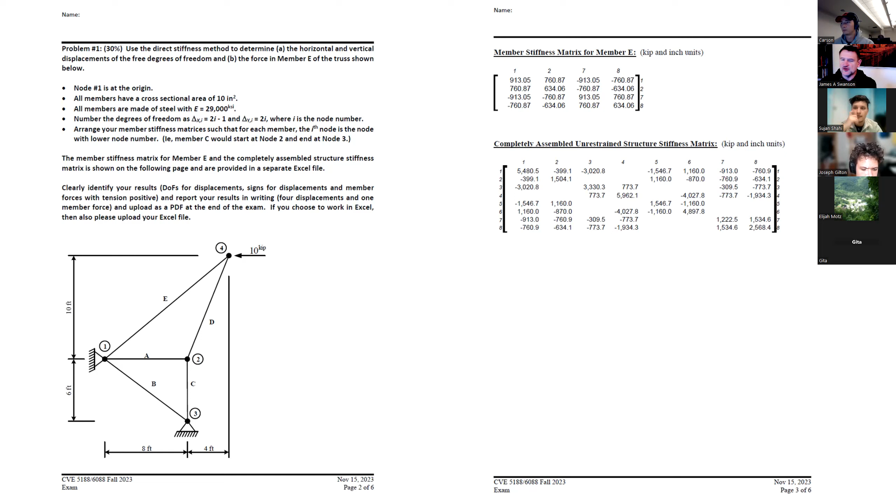I gave you a member stiffness matrix for member E, and the completely assembled unrestrained stiffness matrix to give you guys a little bit of help. If you go through and work out the displacements I asked for, those are given here. In fact, that's all the displacements, because at nodes 1 and 3 there aren't any displacements given, since those are restrained nodes.

The force in member E is 19.53 kips. So a couple of things to note in looking through your solutions - let me sound like an ass for a minute. Nobody should have gotten this wrong, because everybody can go into visual analysis and calculate the right answer. A couple of people still got it wrong.

The displacements I calculated out to 4 significant figures. I had several people submit like 0.0017, or I think there was even one person who submitted 0.002 as the displacement for delta 3. Not okay - you got to go a little bit further than that in order to let me know that you've done some accuracy.

I actually had a couple of people get the force in member E incorrect, and that's something you guys could check using statics and a page - not even a page, a few lines of hand calculations. So again, not to sound like an ass, but you have 3-4 days on a take-home exam. That's probably not something you should miss. That's the slam dunk that goes off the rim and out of bounds, right?

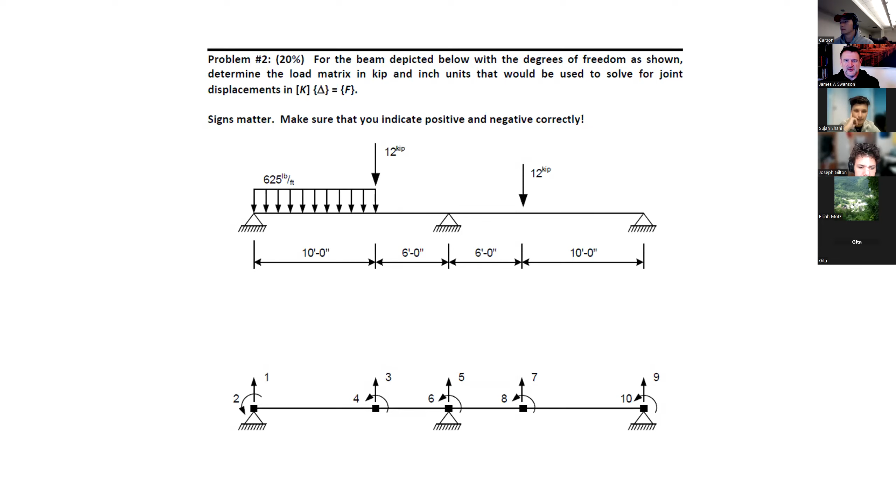Anyways, second problem - I ask you to determine the load matrix associated with this beam. I didn't ask you to actually do the matrix analysis, though I had a couple of people that submitted a full matrix analysis of the problem.

If you go through and use the equivalent end actions, this is the load matrix you should get. I calculated it out using kip and feet units, and then I realized that most of you are going to do it in kip inch units because you're used to using consistent units.

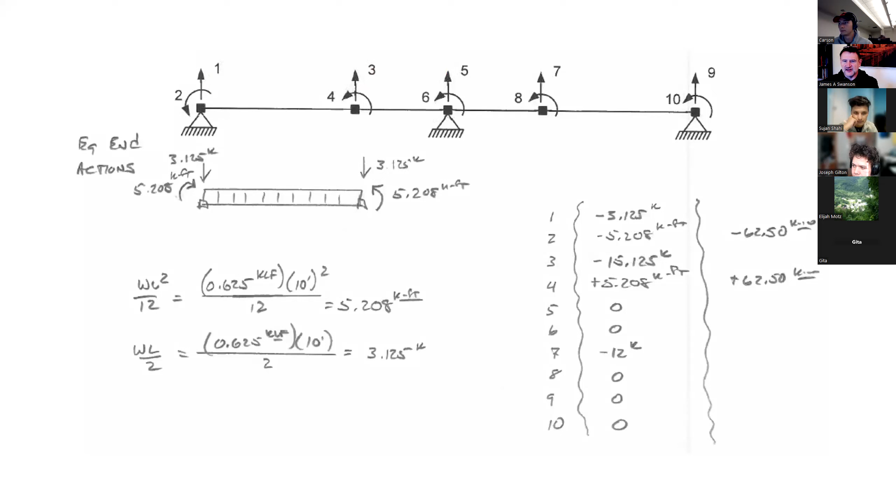So those are the results that you should get for that. Most of the errors I saw in this were associated with using incorrect units or possibly sign errors. A couple of people had signs wrong on these problems.

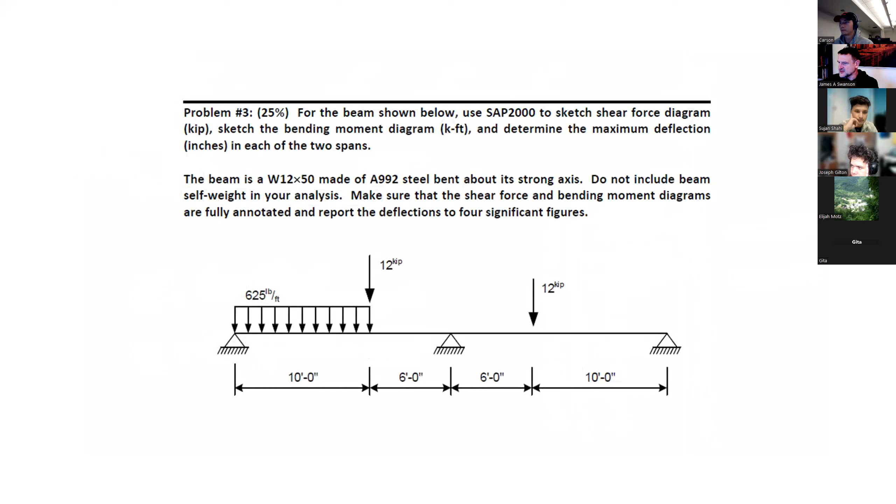The third problem was the same as the second problem, except now I ask you to analyze this beam in SAP 2000 and give me beam deflections and bending moment diagrams. So if we look at those results, this is what we got out of SAP 2000. I think most of the students in the class, and there's only 7 of you, so that's like 5 out of 7, got the right bending moment diagram and shear force diagram.

But we had a lot of errors when it came to the displacements. The crux of this problem is that in order to get accurate displacements or deflections out of a beam problem like this, you have to have nodes along the length of the beam. If you don't put nodes along the length of the beam, SAP 2000 uses a cubic approximation for the deformed shape. And when you have a member subjected to a uniform load like this, that cubic approximation is insufficient. It doesn't give you the most accuracy.

So in order to get accurate deflections, you need to have at least some nodes along the length of the beam. At a minimum, if you put nodes under the point loads, that will give you much more accurate results than having no nodes at all. Just to investigate the extreme, I went in and put nodes every 6 inches, which is probably more than what is really needed for most design work. But I suspect that would give me an answer that would converge if I kept dropping down the nodal location.

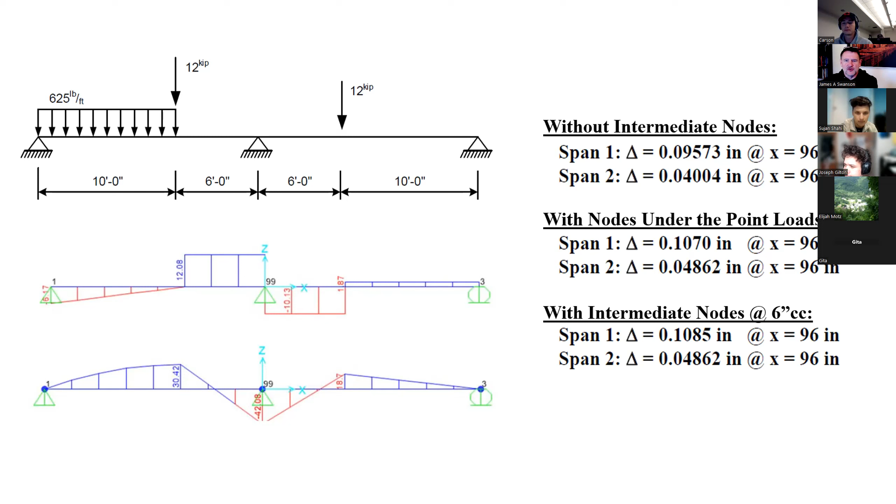So if you got 0.0957 and 0.04004, then you got 15 out of 25 points. I subtracted 10 points for not putting those extra nodes in.

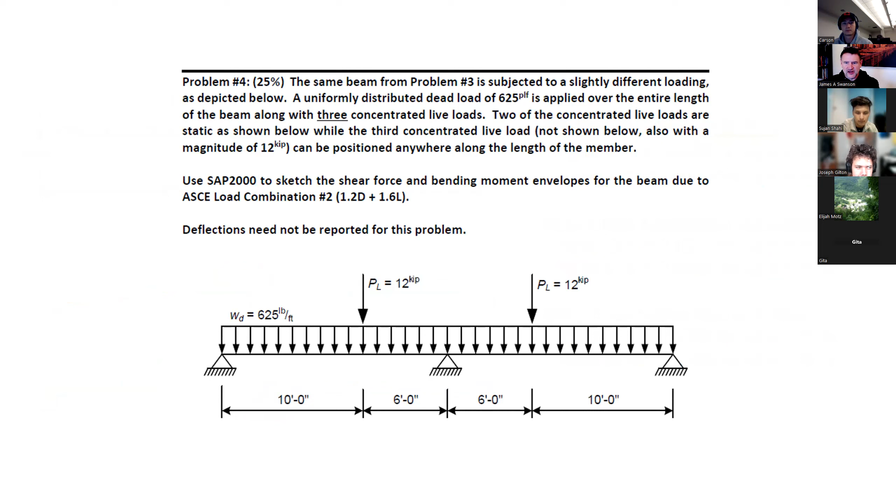And then the last problem was an expansion of the second and third problems. Let's extend the uniform load over the full length of the beam. We'll have the two static point loads, but then I wanted you to add in a moving load as well. So there's a third point load, not shown here, that could be anywhere along the length of the beam. That triggers the idea of a moving load, which takes us from a shear force diagram and bending moment diagram to a shear force envelope and bending moment envelope.

If you go through and use the moving load correctly with a linear add to get your results, then these are the results you would get: basically a maximum positive moment of 104 kip feet, or a maximum negative moment of 110 kip feet. However, if you use a range add instead, then you can get a larger bending moment on the order of 115 kip feet in the positive moment range.

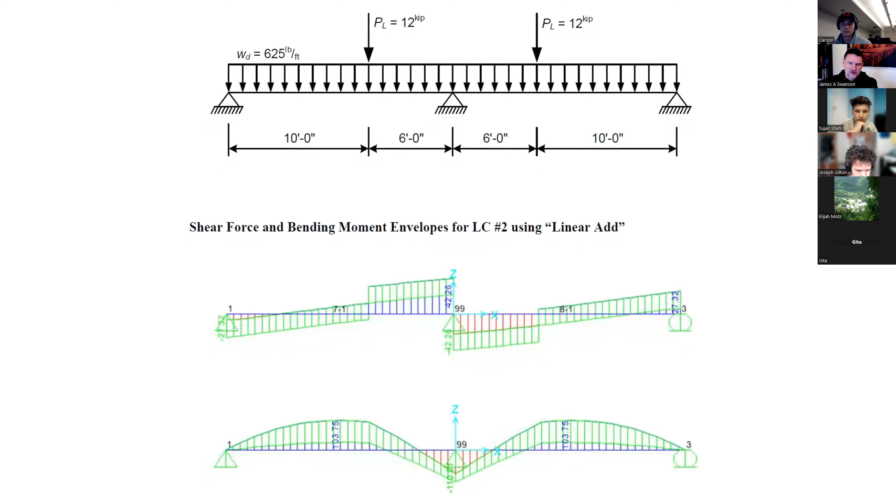That result, if you omit the live load from one span, makes the live load in the other span that much higher. I think I subtracted 10 points for using a linear add instead of a range add. Some of you who got the definition of the moving loads wrong and things like that lost even more points.

So let's see, statistics on this exam aren't that meaningful. There's only 7 samples. The high was a 90, the low was a 59, the average was a 75. There was at least one person who got each problem correct. Nobody got all the problems correct, but somebody got 100, all the points possible, on each of the problems.

Let me go through and do another statistic here. I've got the spreadsheet open on the other computer. Oops.

Statistically speaking, the last problem was the most challenging. On average, students earned 60% of 25 points. The third problem was the next most challenging, with students earning on average 63% of 25 points. Problem 2 averaged 85% of 20 points. And problem number 1 was the easiest, at 92% of 30 points. So that gives you a little bit of statistics there.

So then the question is, well, I only have one exam, I didn't do great on this exam, what does that do to my grade? I never published a syllabus for the course. I kind of regret that. I was waiting for some guidance on teaching assistants. That never came, and I never came back and closed the loop.

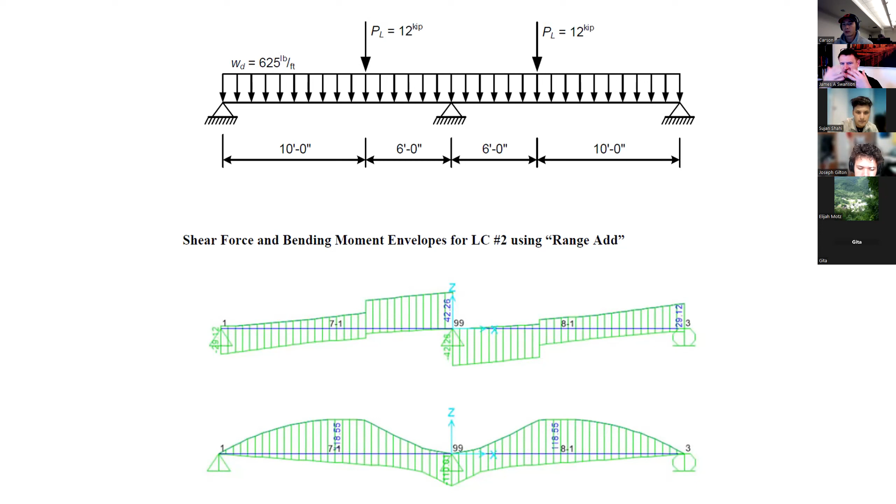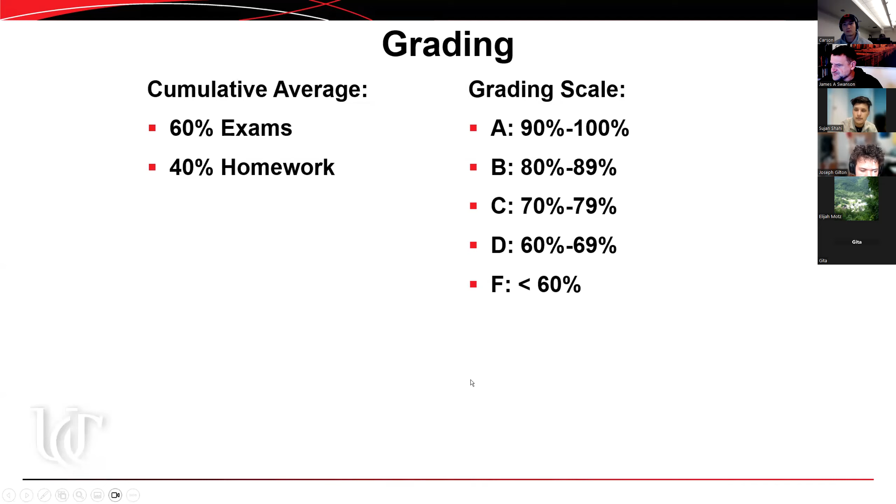Moving to today's agenda: we started talking about AISC direct analysis method, or AISC methods of analysis, in our last lecture, and I wanted to pick up on that today and finish it. Looking ahead, we have one more class on Thursday, and my goal there is to introduce staged construction analysis, which is available in SAP 2000 but not Visual Analysis. This is a specific enough feature that you'll find it in relatively few packages—SAP is the only one I know of, but others may offer something similar.

Let's go back to the direct analysis discussion and pick up where we left off last Tuesday. To remind us, AISC offers a number of different methods for analysis. This conversation is an extension of our discussion on second order analyses—we have P-little-delta and P-big-delta analyses—and that leads into the type of analyses required for the design of steel structures.

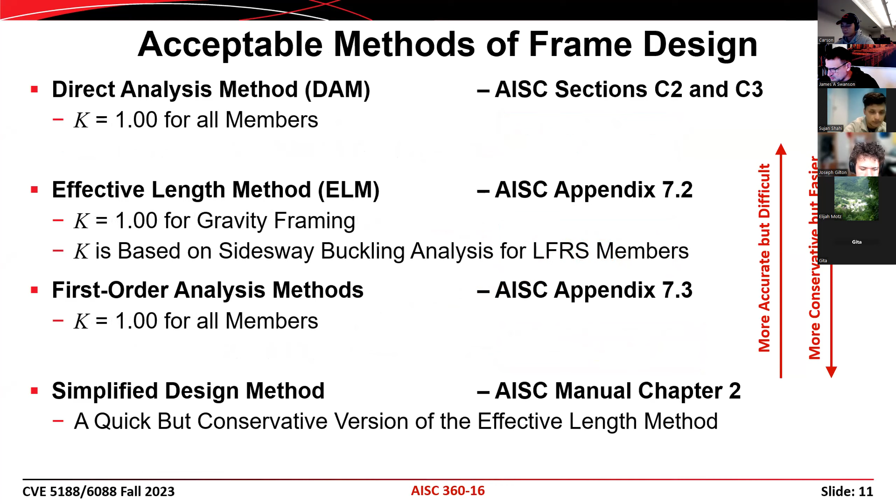So then, at the very end of the lecture, we introduced the idea of a notional load. A notional load is a type of load that is not meant to explicitly model something that's going to be acting on the structure.

When we look at our models, we've been modeling things like live loads and dead loads, moving truck loads, snow loads, wind, and things like that. Each one of those is representative of a physical phenomena, something that's physically acting on the structure.

But a notional load is meant to capture the effects of something we don't want to model explicitly. Examples are things like geometric imperfections, unsymmetrical pattern loads, temperature gradients, foundation settlements, column shortening, and things like that.

The idea is that if we tried to capture geometric imperfections by putting in all the different possible permutations of a building being a little out of plumb, that would become very challenging from a practical point of view. Is it out of plumb to the left? To the right? In this direction or that? What if it's out of plumb in two directions at once? It becomes almost an unworkable problem if you ever want to make any money as a structural designer.

So you can use notional loads instead. You can model the structure as perfectly plumb, but then put a horizontal load on it that gives you axial forces, shear forces, and bending moments in the members similar to those you'd get from an imperfect structure.

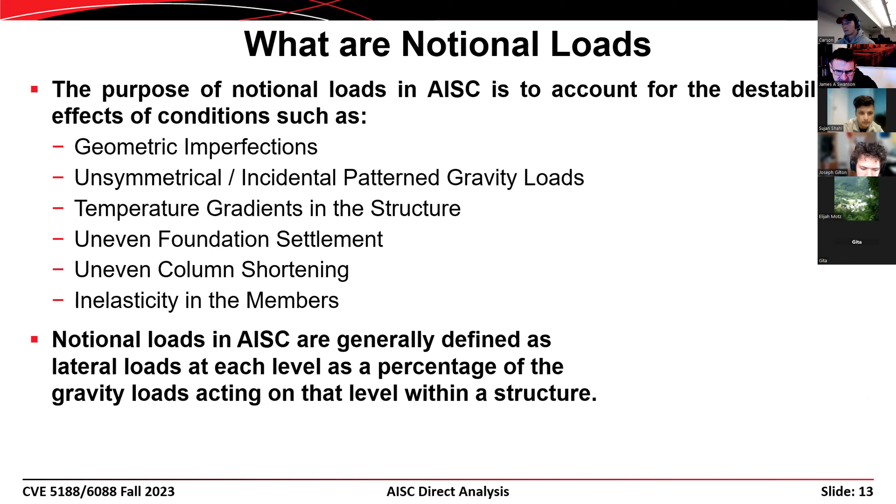In AISC, notional loads are generally defined as lateral loads that act at each level in the structure. They're generally some percentage of the gravity loads acting on each level, and notional loads on the order of 0.2% or 0.1% are typical.

Now that we know what a notional load is, let's dive into some of the requirements included for the different methods of analysis in the AISC specification. We'll start off with the effective length method.

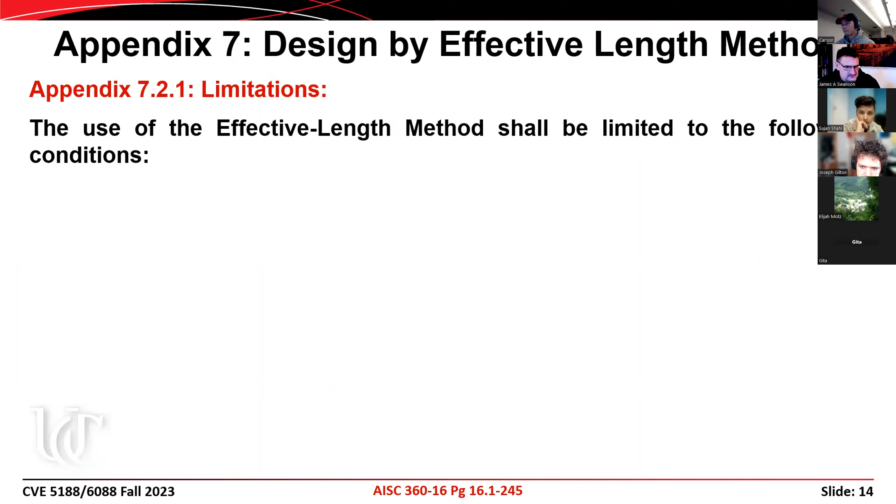The use of the effective length method is limited to certain conditions. The structure must support gravity loads primarily through nominally vertical columns, walls, and frames. That might sound like a no-brainer—most building type structures have columns that are roughly vertical, specified as vertical at the beginning—but that's not always a given.

You can find examples of that on the University of Cincinnati campus. Looking across Nippert Field toward the athletic center, the building I call the Amoeba building has a grid work of columns battered or inclined by about 30 degrees, so those columns are not nominally vertical, meaning you couldn't use the effective length method there. Another example is the Vontz Center for Molecular Studies on East Campus, which has walls that are out of plumb by design, so the columns there probably aren't vertical either—another case where you weren't permitted to use the effective length method.

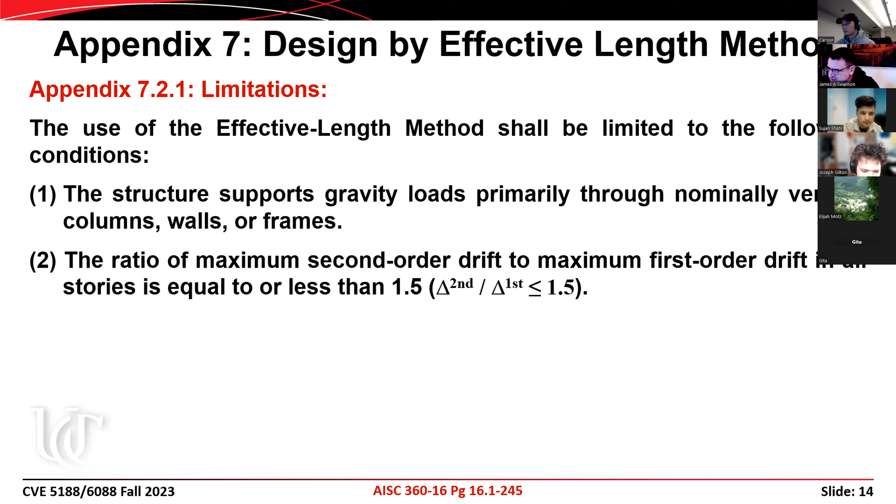The ratio of the maximum second order drift to maximum first order drift shall be less than or equal to 1.5. Delta first and delta second are both determined for LRFD load combinations, or 1.6 times the ASD load combinations.

That brings up something—let me go back to that slide. There was a vigorous discussion at the AISC meetings last week about the inclusion of allowable stress design. That's an issue when we look at the ASD load combinations in ASCE 7 versus the LRFD load combinations in ASCE 7. When we compare the results of designs using LRFD to those using ASD, they're not always comparable, and AISC right now is really grappling with how to deal with that inequality, the lack of agreement between the two methods.

From a fundamental point of view, you shouldn't necessarily get the same design—they're based on two different philosophies. So if you expect to get exactly the same answer, you probably don't have a great grasp of the fundamentals of design anyways. This factor of 1.6 crops up quite a bit.

Sometimes you see a factor of 3/2 or 1.5. You can multiply the ASD loads by 1.5 to get approximately the same LRFD loads. And the options that were discussed a couple weeks ago in Chicago were a little bit different than that. There's a factor that's applied to all the load combinations except for load combination number 1, which is just dead load. So anyways, I thought that was interesting, and it came to my mind when I read that.

So when we talk about the required strengths, they shall be determined from an analysis that includes P little delta and P big delta effects. And in the case of the effective length method, there's no reduction in stiffness required in our model.

EI and EA are permitted to be used at their nominal values for all members. What we'll find is that when we get to the direct analysis method, you have to use a reduced value of EI and EA to account for partial yielding. Things like inelastic flexural buckling of columns, plasticity in beams when they get close to their design flexural capacity, things like that.

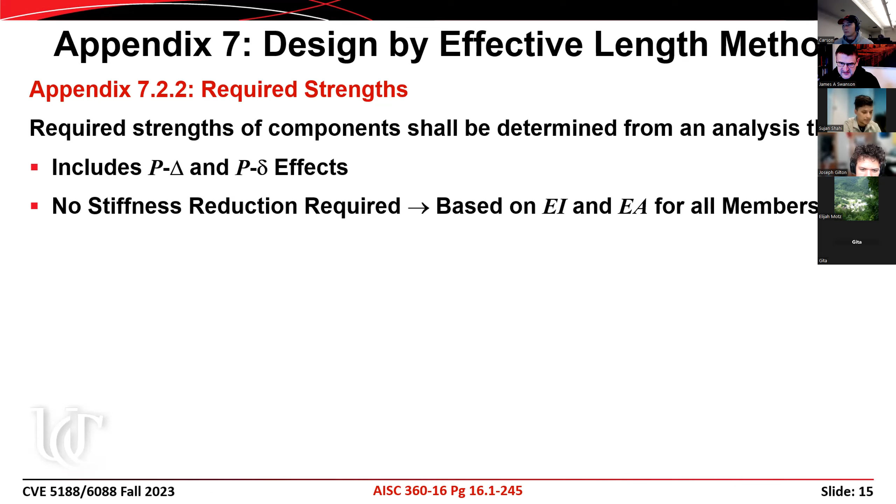Notional loads must be used to represent geometric imperfections. The notional loads are 0.2% of the gravity loads applied to the gravity only load combinations.

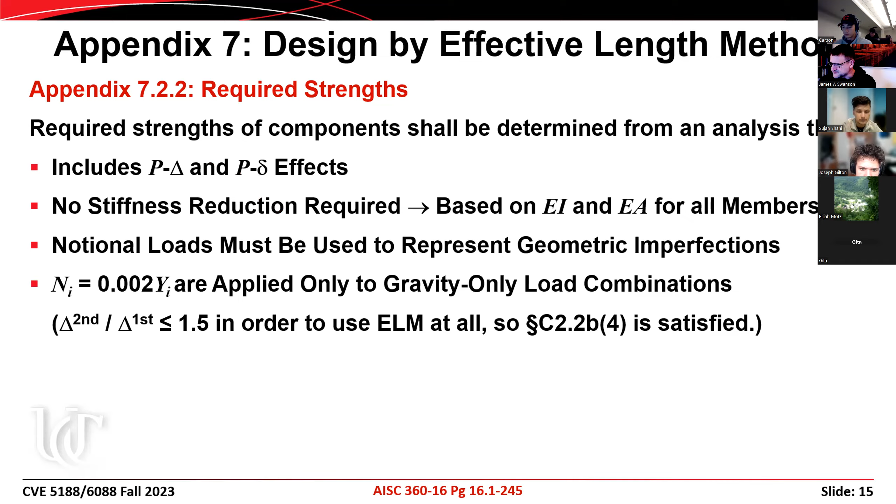All right, the available strengths—if you were to go through and calculate how much capacity a steel beam or a steel column has—are calculated using the appropriate chapters from the AISC specification.

And the effective length factor K for all the members is taken as 1 for braced frame systems, or you take K from your alignment charts for moment frame systems, except that if you have a relatively low value of delta second over delta first—if delta second over delta first is less than 1.1—then you may take K equal to 1 for all of the members.

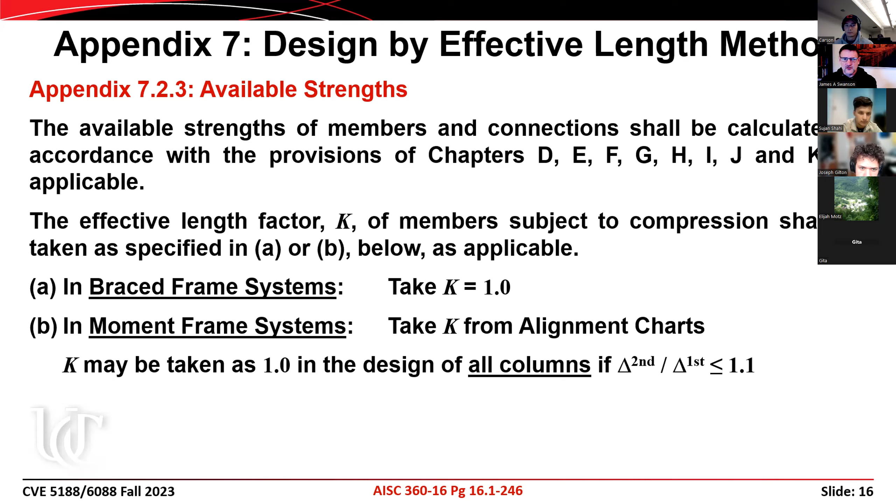And so this is really nice. If the second order effects aren't that large, then just take K equal to 1 everywhere, and that saves a lot of time in calculating the available strengths of the members.

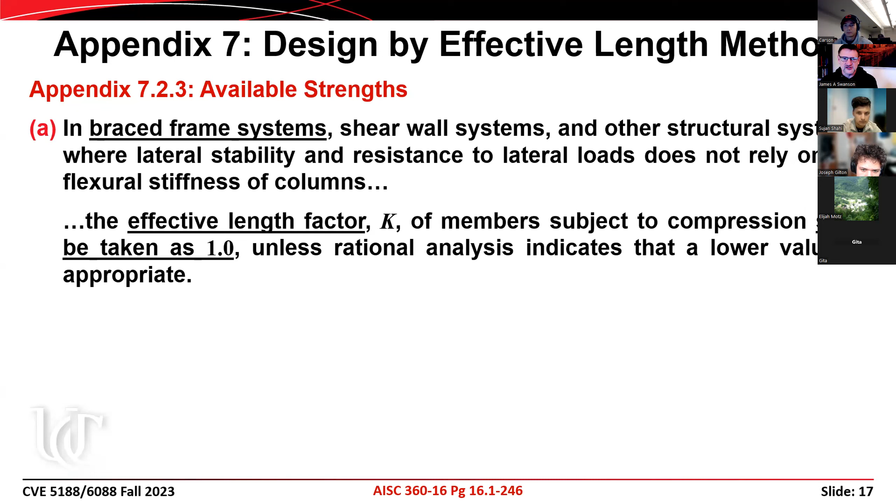And so if you look at the details behind this a little bit, the language of Chapter C and Appendix 7 gets to be a little bit cumbersome, but basically it says in braced frame systems, the effective length factor shall be taken as 1 unless a rational analysis indicates that a lower value is appropriate. So that opens the door to using alignment charts for braced frame systems, and you could potentially end up with an effective length factor less than 1.0, but most practicing engineers will probably take 1.0 and run with that because it saves a lot of time in their calculations.

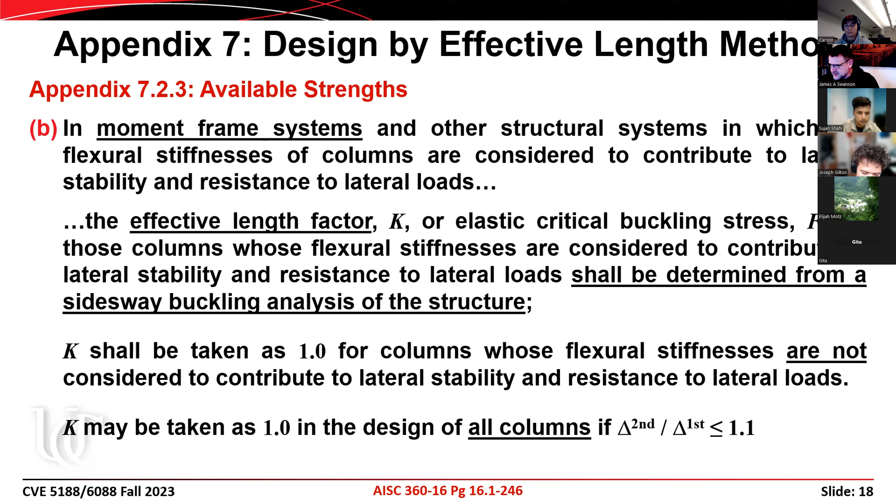Then looking a little bit more at the detailed language associated with moment frames, you see similar language there. Effective length factor shall be determined from a side sway buckling analysis, which means using alignment charts, and there's your value of 1.0 if delta second over delta first is less than 1.1.

So there are flow charts that are helpful, and this is one flow chart here that goes along with our effective length method. If delta second over delta first is larger than 1.5, then you can't use it—you have to use a direct analysis method.

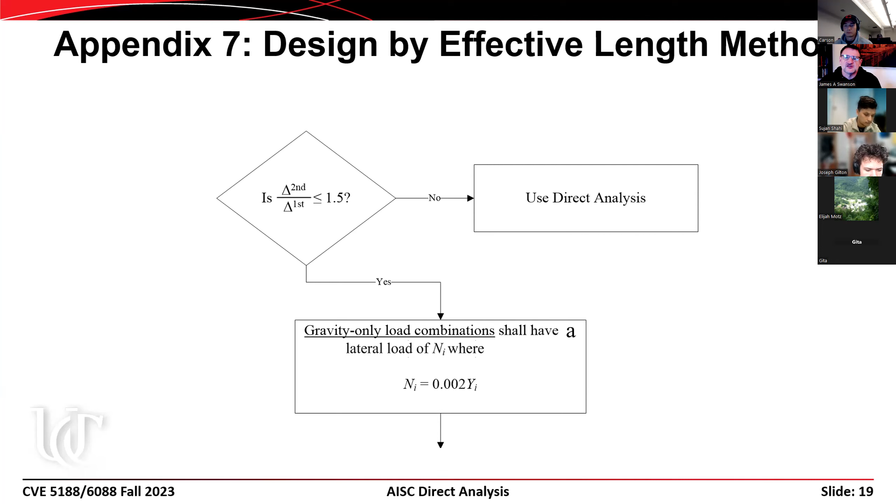If it is less than 1.5, then you apply notional loads to the gravity only load combinations, where the notional loads are equal to 0.002 times Y sub I. So what that means is that you're going to have a notional load associated with dead, a notional load associated with live, a notional load associated with snow, roof live load, and rain load as well. So you're going to have one notional load at each level associated with each of the gravity loads that are assigned, and then you include those in the load combinations multiplied by a factor of 1.2 or 1.6 or whatever is appropriate for the given load.

Okay, then after you have all those loads applied, you can come down and use a second order analysis. We'll almost always go in this direction in our discussion because we're talking about finite element analyses. The approximate second order analysis method is becoming rather antiquated now anyways.

After you have your moments and axial forces, M sub u and P sub u, from your second order analysis, you compare those to the available strengths. If delta second over delta first is less than 1.1, you're allowed to take K equal to 1. Otherwise, you use the alignment charts for your K factors.

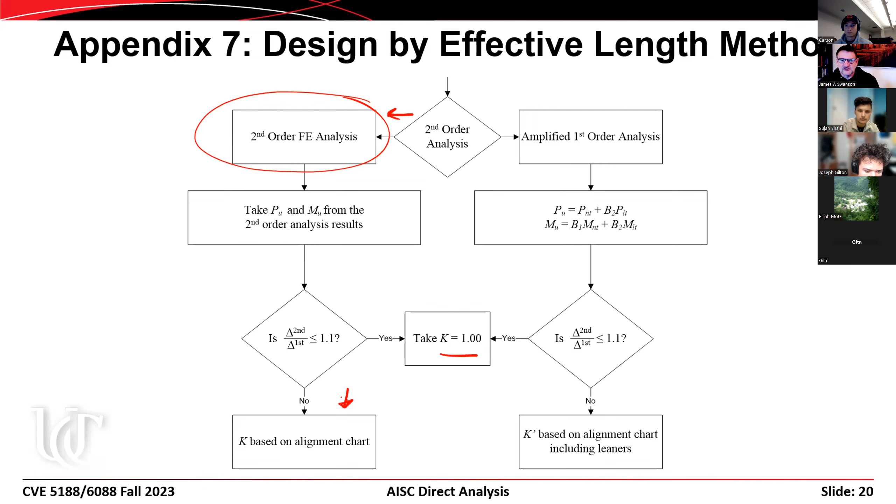Having discussed that, let's discuss the direct analysis method of design now. This is the most sophisticated of the analysis methods, the one that can be applied to any structure.

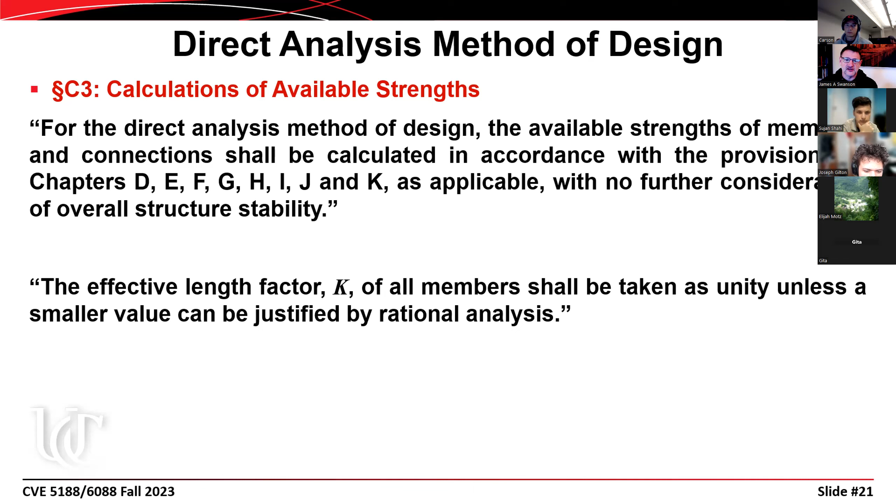That's the real benefit of the direct analysis method. You invest a little bit more time in the analysis of the structure, and you can save that time in the calculation of the available strengths of the members.

So when we talk about what has to be included in our analysis, it has to include these 5 items. If you talk to some of the folks on the AISC committees, they would refer to these as the big 5 sources of instability.

Item number 1: the flexural, shear, and axial deformations of the members, and all other deformations that contribute to the displacement of the structure, have to be included in the model. Flexural and axial deformations are included even in visual analysis. SAP2000 by default includes shear deformations, and visual analysis will include them too if we ask it to, but we have to be a little tricky in doing that.

Second order effects have to be included, both P-big-delta and P-little-delta. That involves changing the analysis definitions in SAP2000, possibly using automatic meshing so we have multiple nodes along the length of the member, etc.

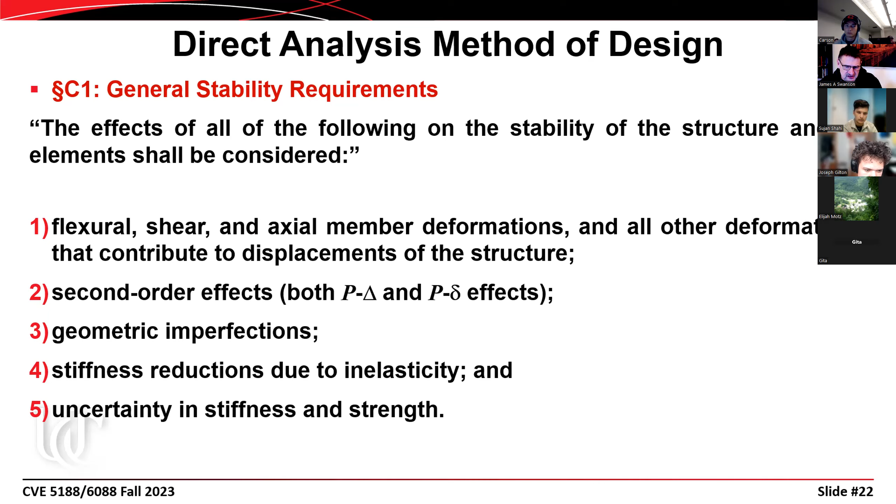Geometric imperfections have to be included. That doesn't necessarily mean you have to model the structure out of plumb—there are other methods of including geometric imperfections, but you have to use something to account for them in your model. Stiffness reductions due to inelasticity, and then uncertainties in the stiffness and the strength, round out the requirements.

So if you're going to use load factors, they have to be defined in what we would call a load case in SAP2000, not in a load combination. This reinforces the idea that superposition holds when we're doing a linear first order elastic analysis, but superposition does not hold when we're doing a second order elastic analysis.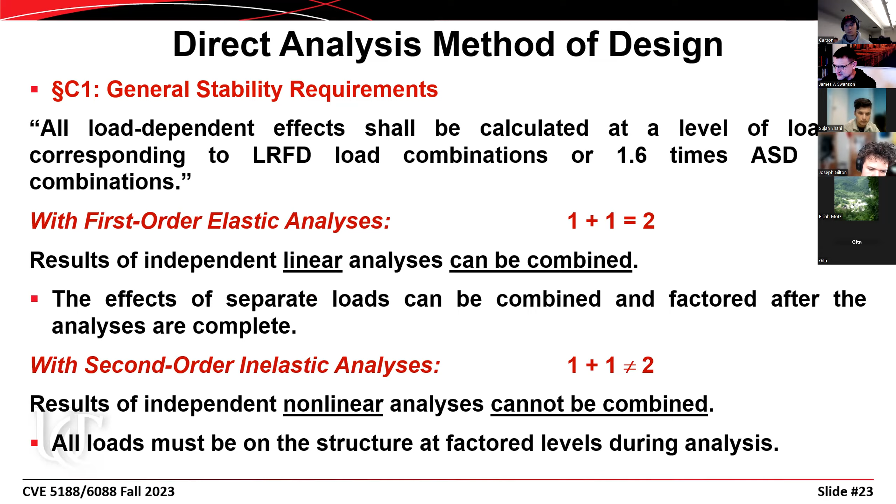In actuality, a lot of connections are somewhere in between—not quite fully rigid, but not quite simple either. AISC has us categorize them as either FR, simple, or PR. When we model a partially restrained connection, we're supposed to use some type of spring model. SAP2000 allows us to do that—we can put in a rotational stiffness to account for PR connections.

Okay, item number 2, we have to include P big delta, P little delta analysis. It doesn't say that we have to do a rigorous analysis. We don't necessarily have to use a Newton-Raphson approach or something like that. We can use an approximate analysis.

But here's where the benchmark problems that are in the AISC manual come into play. You have to validate your software using those benchmark problems before you can move forward using a p-delta analysis. So that's what's covered there.

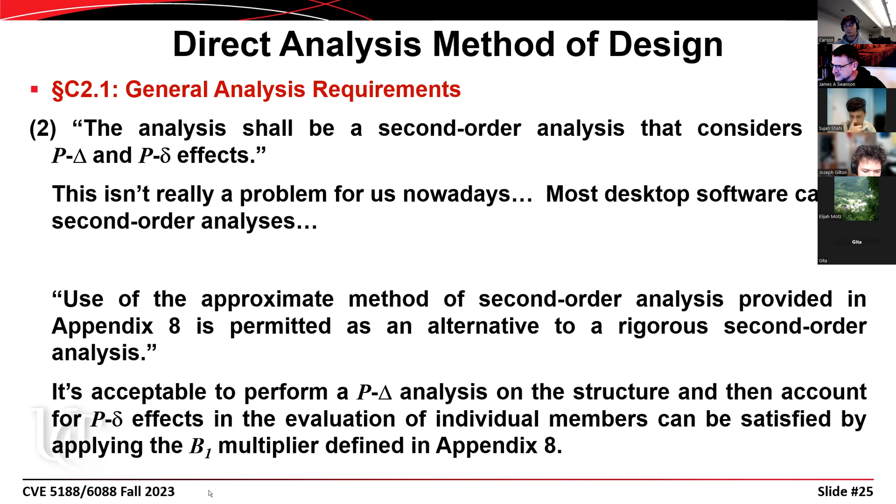You're also allowed to use an approximate analysis, and this is the B1 factor that you'll find in Appendix 8 to the AISC specification. It's permissible to neglect p little delta effects on the structure when the following conditions are satisfied: when the structure supports gravity loads through nominally vertical columns, when the ratio of delta second over delta first is less than 1.7, and when no more than 1/3 of the total gravity load on the structure is supported by columns that are part of the moment resisting frames.

But my 2 cents on this is that if you're including second order effects, all you have to do is auto mesh the structure in SAP 2000 and you're automatically accounting for p little delta effects anyways. So I don't see this as being a particularly large hurdle. Maybe if you're using a package like Visual Analysis where automatic meshing is not as easy, then capturing p little delta effects might be more challenging, and this might be a nice way of accommodating that in a package that's less sophisticated than SAP 2000.

Okay, item number 3, the analysis shall consider all gravity and other applied loads that may influence the stability of the structure. And it's important to include gravity loads in the analysis. There's a temptation, or maybe if you go back 10, 20, 30 years in structural engineering, you might have one model of the structure that you use for gravity loads, but then have a separate analysis for lateral loads. You can't do that. You have to go back and have all of the loads on the structure at the same time.

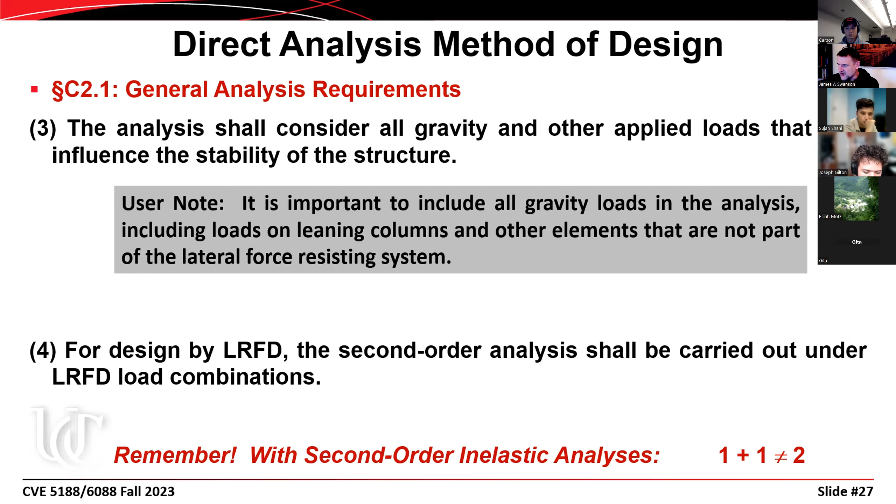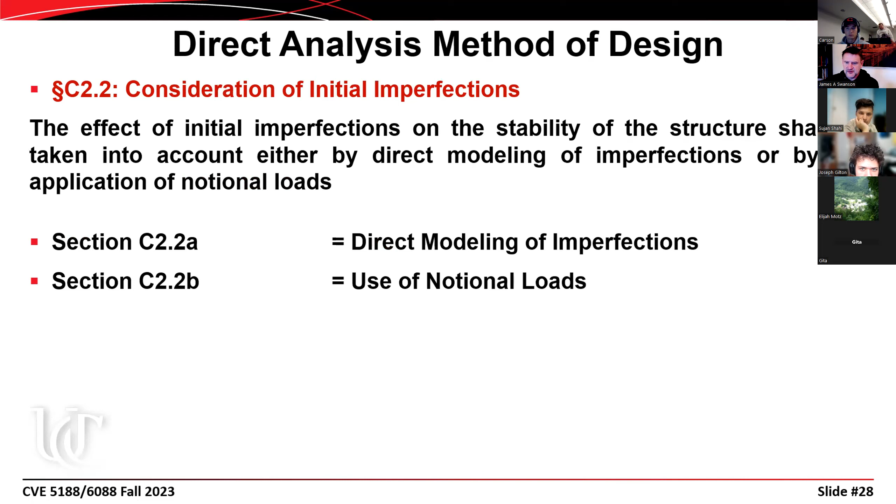This goes back to the idea that we can't use superposition of the results of individual analyses. We have to have all the loads on the structure at the same time. So when we talk about geometric imperfections, that's covered in section C2.2. AISC gives us 2 different options for that. We can either use direct modeling of the imperfections, or we can use notional loads to account for the anticipated imperfections.

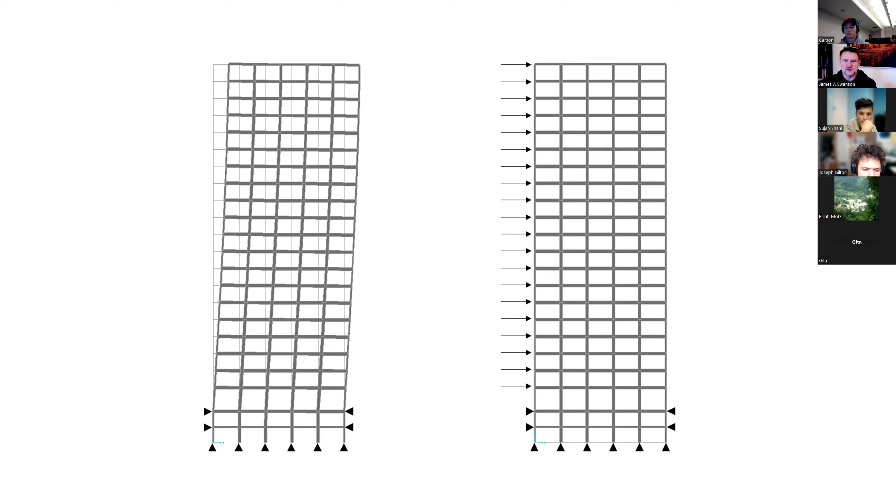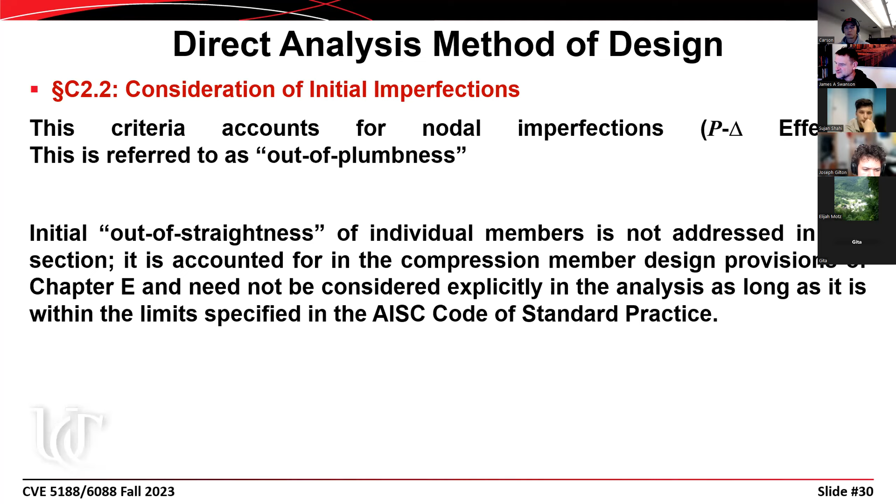So then the next question is, well, how far out of plumb do they have to be? Well, the initial out of straightness is accounted for in the compression member design. But when you talk about the initial imperfections, the structure should be analyzed with joints displaced from their nominal locations. The magnitude of that initial displacement shall be the maximum amount considered during design, and the pattern of initial displacements shall be such that it provides the greatest destabilizing effect.

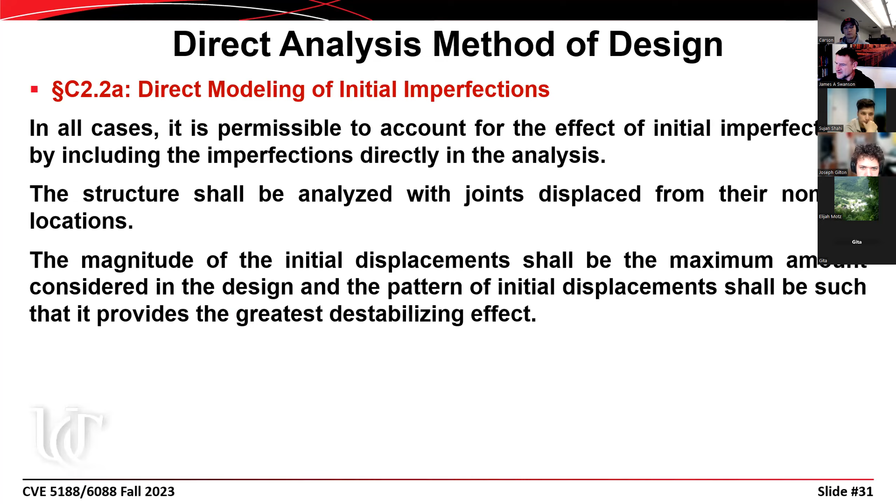So what you can do is go to the AISC Code of Standard Practice, which includes reference to an initial out of plumbness of about 1/500. You can go to other governing requirements if there are some. Maybe you're designing for the LA building code or the New York City building code, and they might have something different there, so you're allowed to use that.

Or maybe the initial imperfections are known. If you're doing an analysis of an existing structure, maybe you're considering a structure that was erected 30 years ago and they're redesigning it or adding on to it or renovating it or something like that, then you can go out and take shots with a total station or whatever and use the actual imperfections. That's permitted as well.

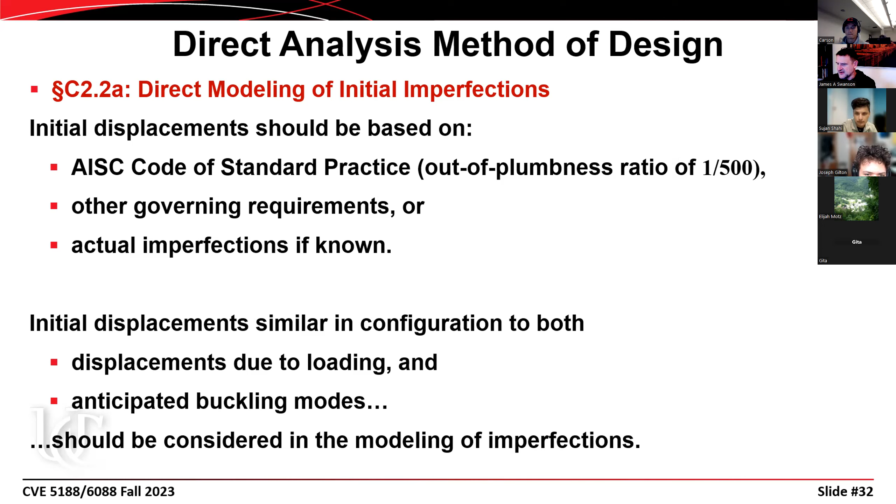When you consider the initial displacements, you're supposed to consider displacements due to loading, anticipated buckling modes, and you should consider modeling of those imperfections, both patterned together and individually. And so when you look at different modes of buckling, the first mode of buckling for this structure, the first mode of vibration, is shown here on the left.

The second mode of vibration is shown in the middle, and the third mode of vibration is shown on the right. When you're dealing with a package like SAP2000, you can pattern these together and have it displace those nodes. But my two cents on this is that I think most practicing engineers are going to

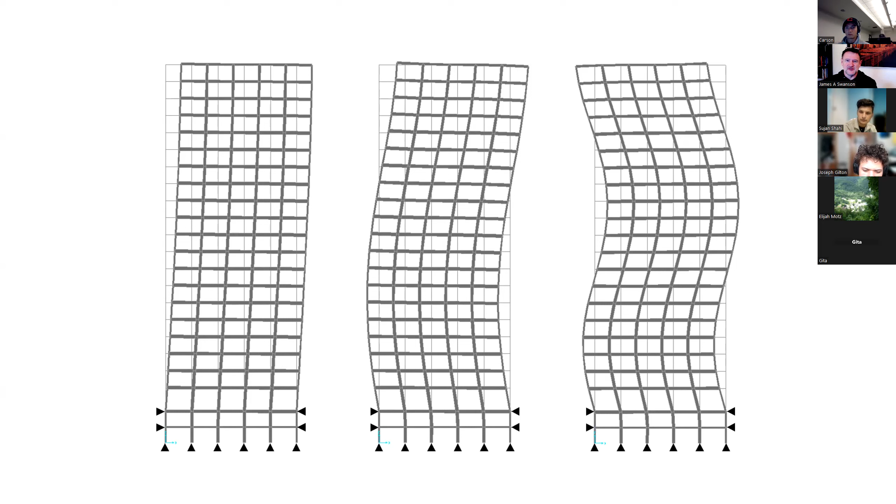use the notional load approach instead of modeling these initial imperfections. It would have to be something rather outside the box in order to justify the amount of time required to do this, particularly if you're going to a 3D type of analysis. If you're going to go into ETABS and do a 3D model of the structure instead of a 2D model, then this gets to be a Pandora's box, something that could take a lot of time.

In the analysis of structures that support gravity loads, primarily where delta second over delta first is less than 1.7, it is permissible to include imperfections only in the analysis for gravity-only load combinations, and not in the analysis for load combinations that include lateral loads.

That's important, because if you include the initial imperfections and then add wind load on top of it, the two become additive to each other. So if the second order effects aren't large, if delta second over delta first is less than 1.7, then you don't need to include the imperfections in load combinations 4, 5, 6, and 7, where you have wind and seismic. There's also a star notation there too, delta second star and delta first star.

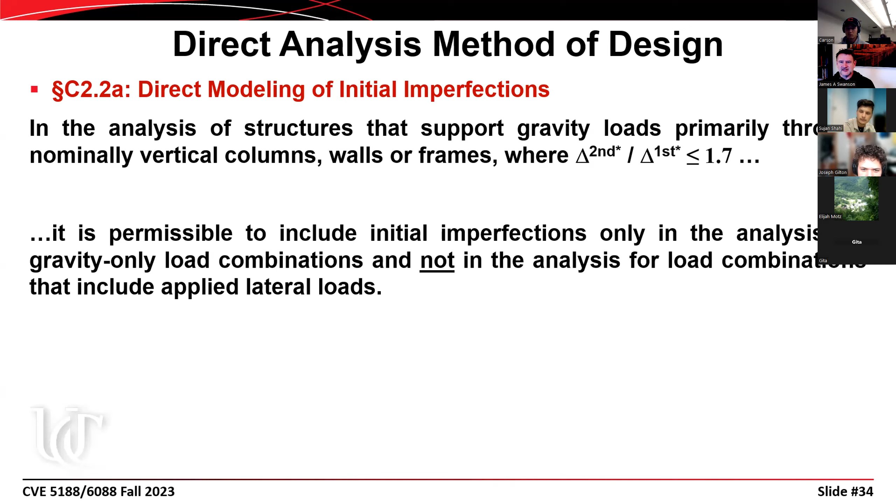They're not the same as delta second and delta first. The difference is that delta second star is calculated using a reduced stiffness, and delta first star is also calculated using a reduced stiffness. I'll come back to that in a moment when we get to that.

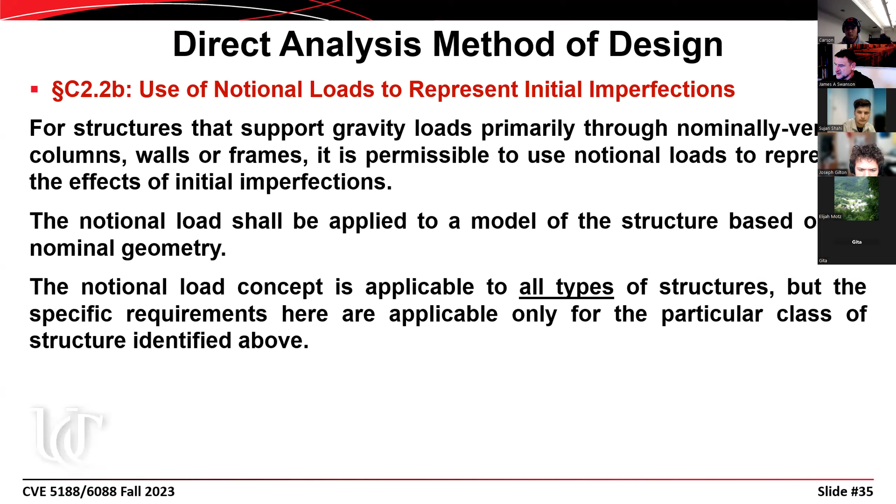Here's how we would account for geometric imperfections using notional loads. The notional load shall be applied to the model based on its nominal geometry, and is applicable to all types of structures. The notional load is equal to 0.2% of Y sub i, where Y sub i is the gravity load applied. It shall be additive to the other loads, and in all load combinations, not just the gravity-only load combinations.

When it says additive, what that means is if the wind load is pointing from left to right, then the notional load should also point left to right, so that it creates a worst case effect. If the wind load is pointing from right to left, then the notional load should point in the same direction as that wind load.

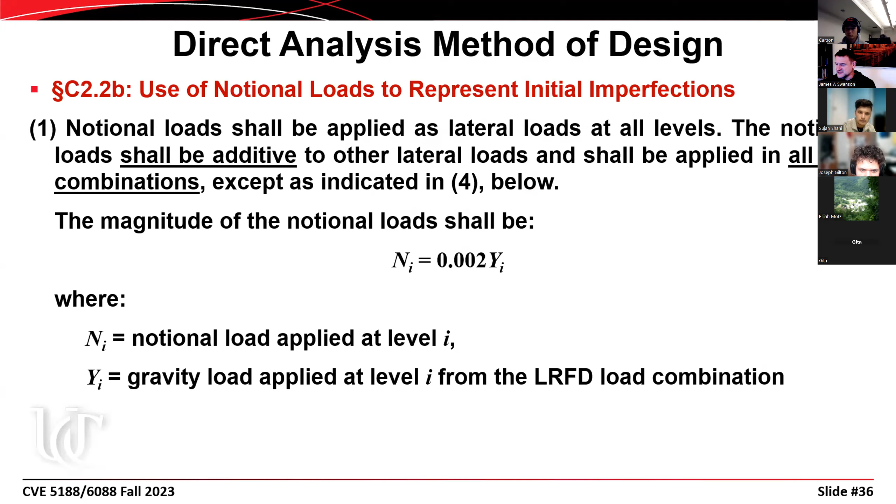Here's another caveat: when delta second star over delta first star is less than 1.7, then the notional loads can be applied to the gravity-only load combinations.

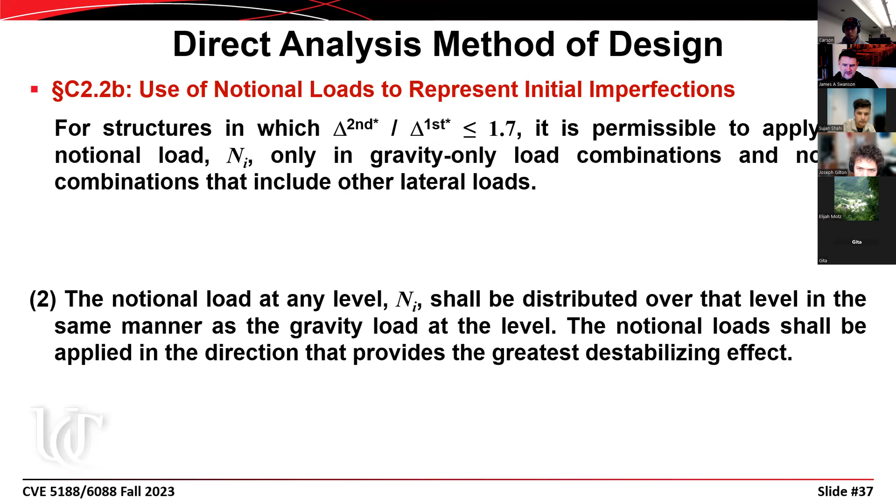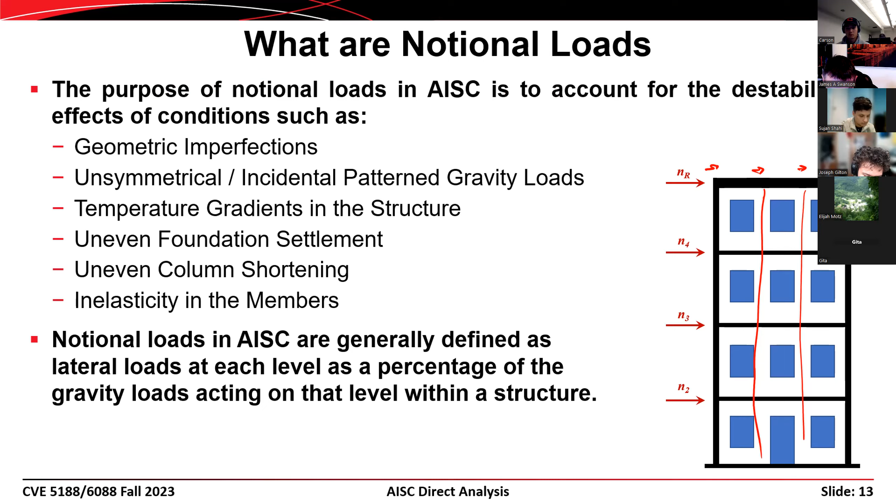Back to where we were with that slide - that was slide number 37. Slide number 38: the load coefficient of 0.002 on our notional loads is based on an initial out-of-plumbness of 1/500.

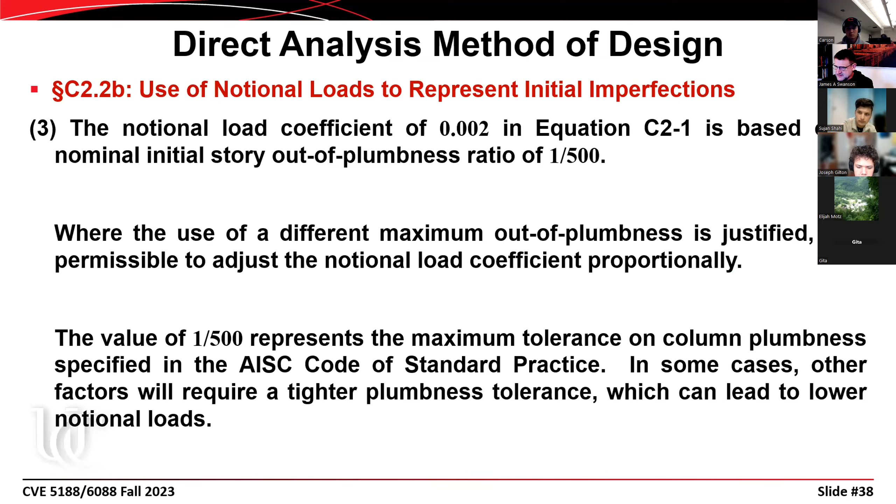If you want to use a smaller or larger value of the initial out-of-plumbness, you're allowed to adjust those notional loads appropriately - that's permitted in those cases. Now here's a reference to the adjustment to stiffness. I mentioned that in a lot of cases we're going to have columns governed by inelastic flexural buckling, or beams governed by plastic moment. In those cases, some of the material is yielding, so we end up with a reduced stiffness. So what this says is that a factor of 0.8 shall be applied to all stiffnesses that are considered to contribute to the stability of the structure.

So basically, we go back to our classification of lateral force resisting systems versus gravity systems. If you put a horizontal force on the structure and you develop a bending moment or an axial force in that member, then that member is part of the lateral force resisting system, and its stiffness should be multiplied by a factor of 0.8. That can be challenging to apply to some members but not all members, so AISC recognizes that and says it's permissible to apply this reduction factor to all of the members in the structure.

So you can just go in and modify the value of E for all the members made out of steel, or you could select all the members and use a property modifier of 0.8 on E, or a property modifier of 0.8 on A and I, and be done with it.

There's a user note that talks about some of the challenges if you apply the stiffness reduction factor to some members but not others, then that can be problematic in the model of the structure.

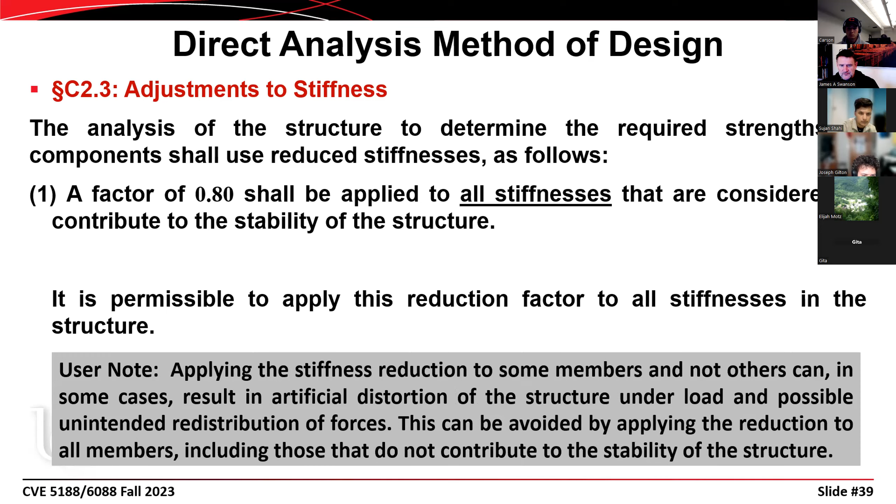There's Joe. Hi, Joe. All right, you're required to include an additional factor for the flexural stiffnesses based on the amount of loading present in the columns. If you have lightly loaded columns, then the stiffness reduction factor is taken as 1.0. If you have heavily loaded columns, then you're supposed to calculate a stiffness reduction factor using this equation, C2-2B.

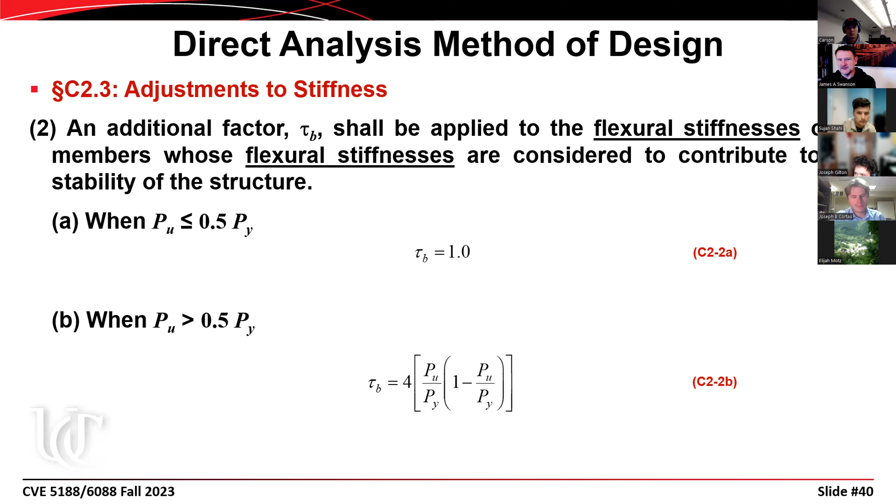This is challenging though, because the model definition for the structure depends on the amount of force that's in the member. It's one of those chicken and egg problems - you can't calculate tau until you know P sub U, and you can't calculate P sub U until you know tau. So there's a short circuit method that's applied here.

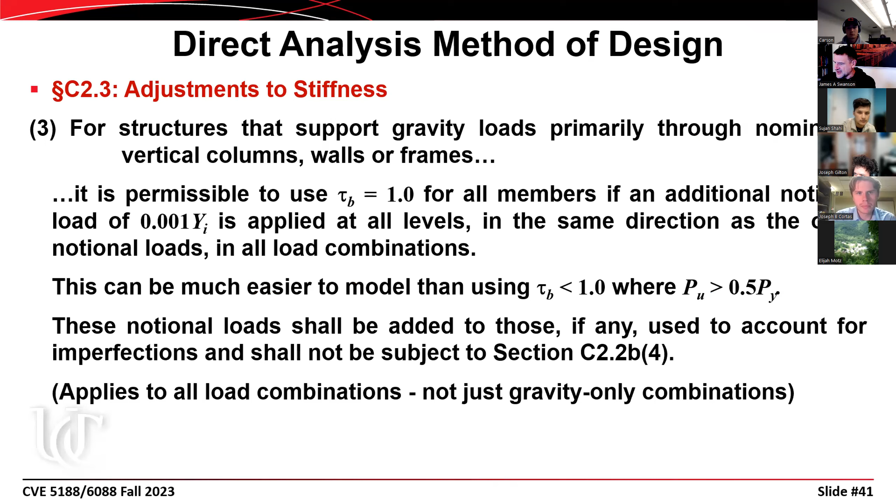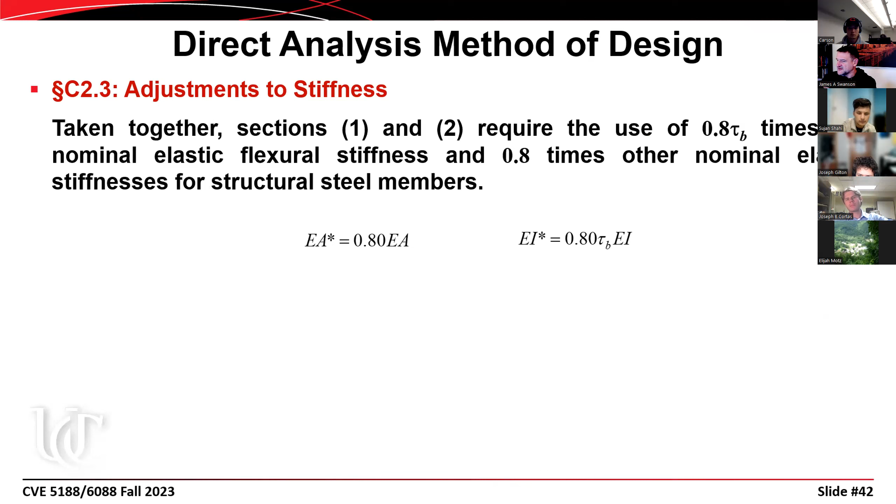You're allowed to use a value based on another value of 0.8. So you're allowed to use 0.8 times tau sub B. And if you want to, you're allowed to take tau sub B as a lower bound, I think of 0.8 again. So you end up with 0.64 times E times I.

Where you have other materials in there, you would refer to the governing codes and specifications on how to account for their stiffness reduction. So if you have a structure made out of both steel and concrete, you would go into the ACI specification on how to model the beams and columns there. Remember, we use different property modifiers to account for cracking in concrete members, and we would need to account for that as well.

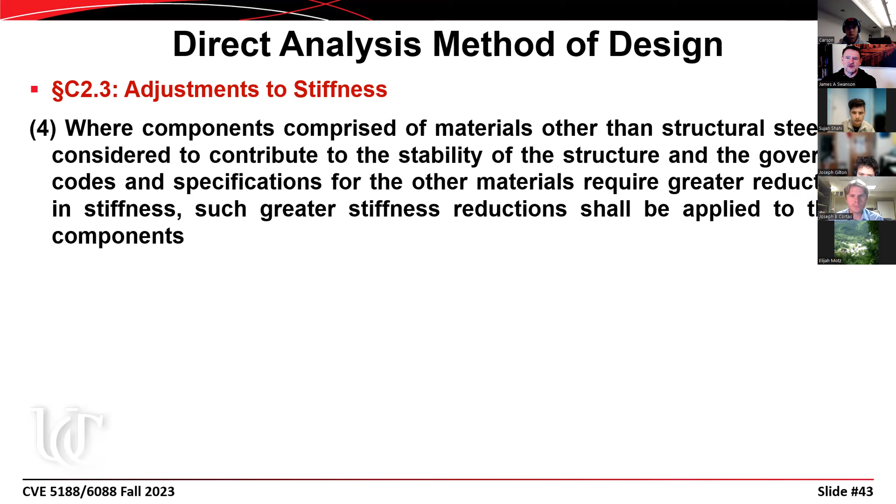So in summary, with the direct analysis method, it's applicable to all structures. There's no restrictions. We design all members using K equal to 1.0. We're required to do second order P-delta and P-little-delta analyses, though a second order P-little-delta analysis can be neglected in some cases. The model must include connection deformations - that includes FR, PR, or simple framing.

And so when you do that, rigid end offsets and things like that come into play. I don't think I mentioned that a few slides ago when we touched on that, but you could use rigid end offsets and you can have the offset stiffness factor that we discussed for SAP 2000.

You have to include for the initial imperfections. Notional loads are typically used, but you're allowed to use direct modeling of initial out-of-plumbness and things like that. And you have stiffness reduction that's required, where you reduce the stiffness of all lateral force resisting system members by 20%.

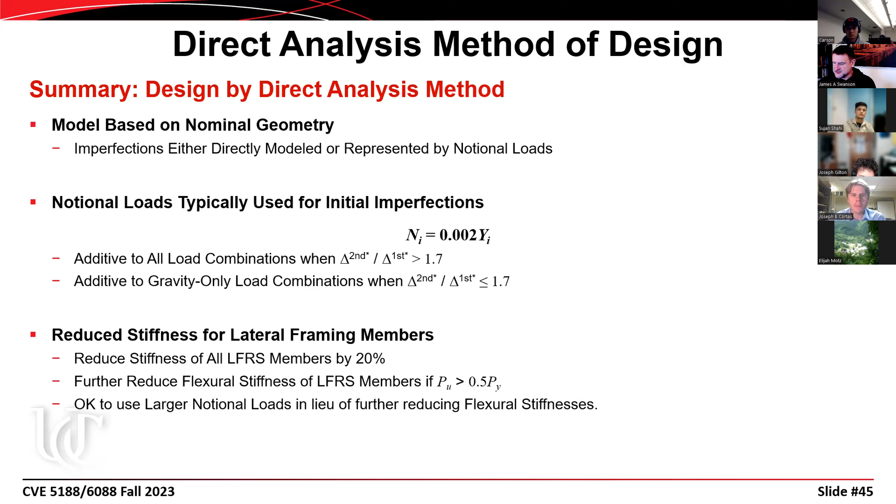All right, so if we apply a flow chart here, if we have a case where delta-second over delta-first is less than 1.7, then all the gravity load combinations have to include our notional loads. If it's greater than that, then all of the load combinations have to include the notional loads.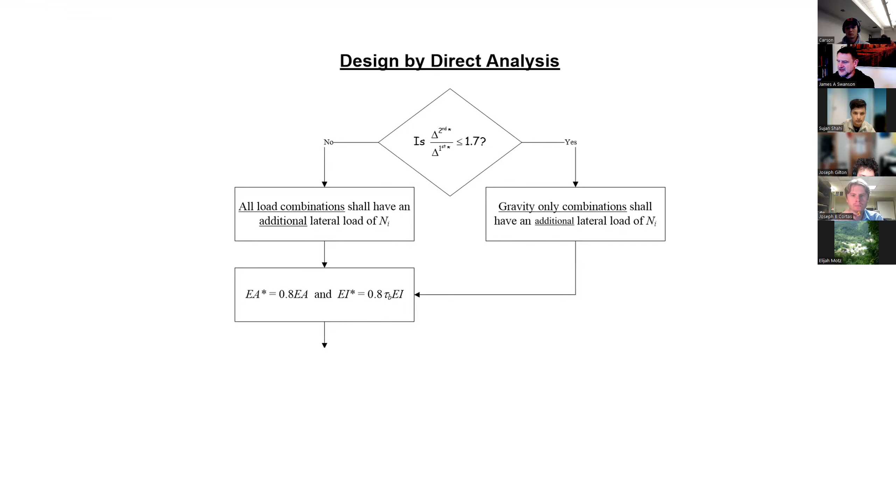We have a value of EA-star and EI-star that include stiffness reduction. And then after we have our model defined, if we have P sub U less than 0.5 times P sub Y, then tau is equal to 1. Otherwise, we calculate tau using this equation.

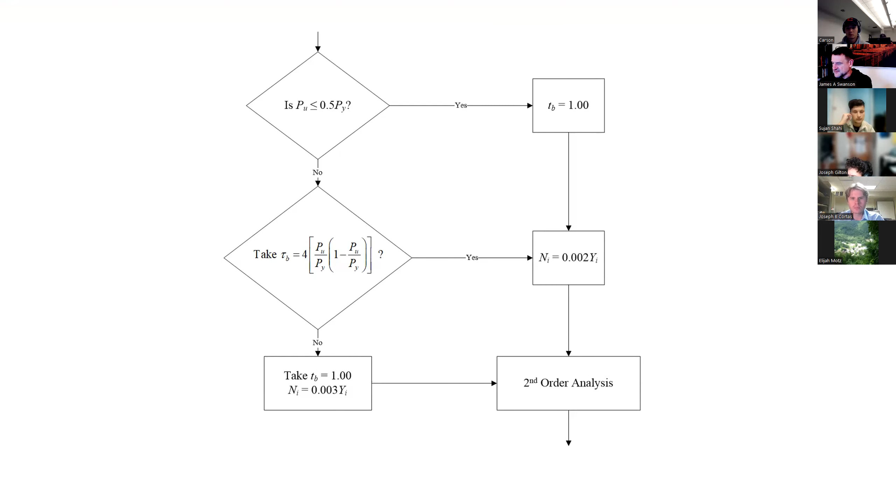We're allowed to short circuit that and add additional notional loads, or we're allowed to take tau explicitly. If we take tau equal to 1, we use an additional notional load of 0.3% instead of 0.2%. We go through, do our second order analysis, and then when we're done with that, we can use a K factor equal to 1.

Now, it's not my intention to talk about the other methods, but this being a modeling class, it's more appropriate to use either the direct analysis method or the effective length method.

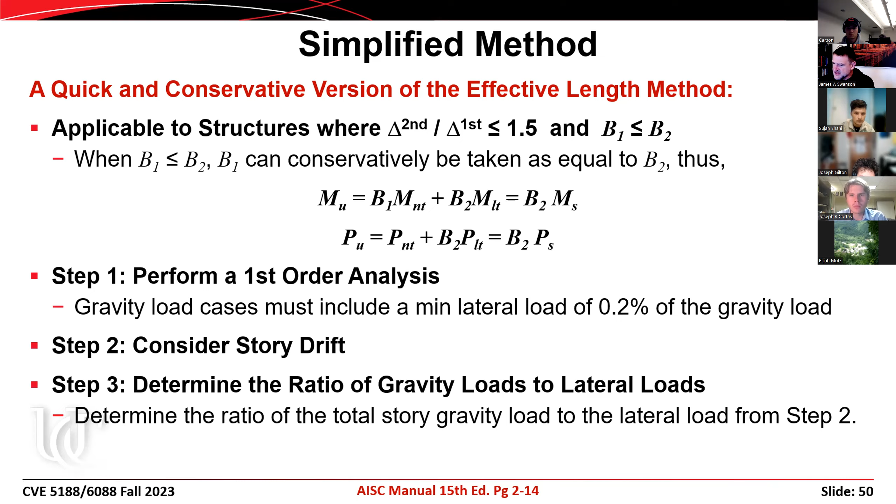But if you wanted to go back and use the simplified method of analysis, you could use these old B1 and B2 factors, where we're multiplying the non-translational moments by B1 and the lateral translation moments by B2. The problem is that it doesn't account for things like leaning columns, and so that becomes problematic.

There's a card that comes with the AISC manual that outlines a fourth method, the so-called simplified method. With this, you estimate what your story drift is going to be, anywhere from H over 100 to H over 500. Based on that and your ratio of the load from step 3, you can calculate a factor that's applied to all of the bending moments and axial forces. So this is basically just a watered down version of the effective length method.

All right, so when you go into a package like Visual Analysis or SAP 2000, you'll see options. Let me go ahead and launch Visual Analysis and I'll show you there.

Oh, this version expired. Golly, that's right. I forgot, I didn't update it on this computer. Let me jump into the other computer, that'll take just a minute.

Let me close the grade sheet I was looking at so I don't inadvertently show you somebody else's grade. That would get me in trouble. I'm sure there's volumes of paperwork I'd have to fill out for that.

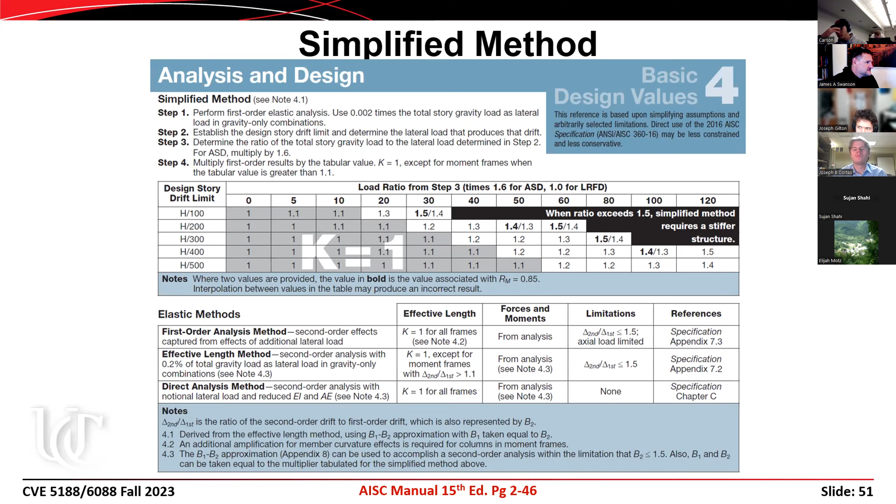All right, so here's Visual Analysis. When we go into our model filter, our project settings, let's see, where is it? Under the analysis type, you have first order, you have P-delta, and you have AISC direct.

In theory, you can just click that AISC direct type of analysis, and then you've checked all of the boxes that AISC would have you do. I would have to caution you about that, though. It might work just fine.

I don't want to say something that's going to get me in trouble with the folks at IES, because they give us a great package at no cost and it does a lot of good things for us. But anytime you rely on a piece of software to calculate so many things automatically, you're opening yourself up to problems. By checking that little option, you're basically saying you're going to trust Visual Analysis to calculate notional loads, stiffness reduction, and all these other things, and then do a second order analysis and do all of that right and give you the results. And I lack trust. I have trust issues. Some of those are associated with my personal relationships, but more of them are associated with structural analysis packages that I use. So when we talk about Visual Analysis, I'd be very reluctant to just check that box and assume everything is done correctly.

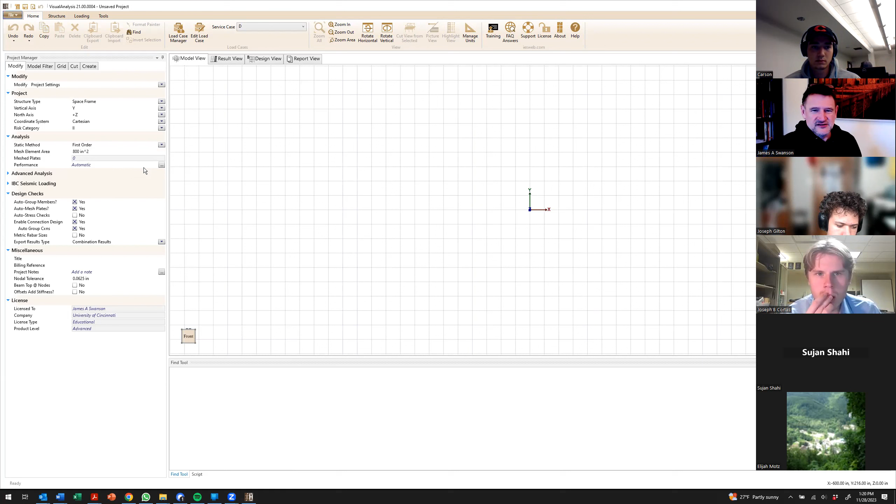Now, if we go in and look at SAP 2000, that'll take a minute to launch. The associated parameters for direct analysis there are buried a little bit, not as obvious as they are in Visual Analysis. If we go in here, let's see, I don't want to open up your files, let me open that up instead.

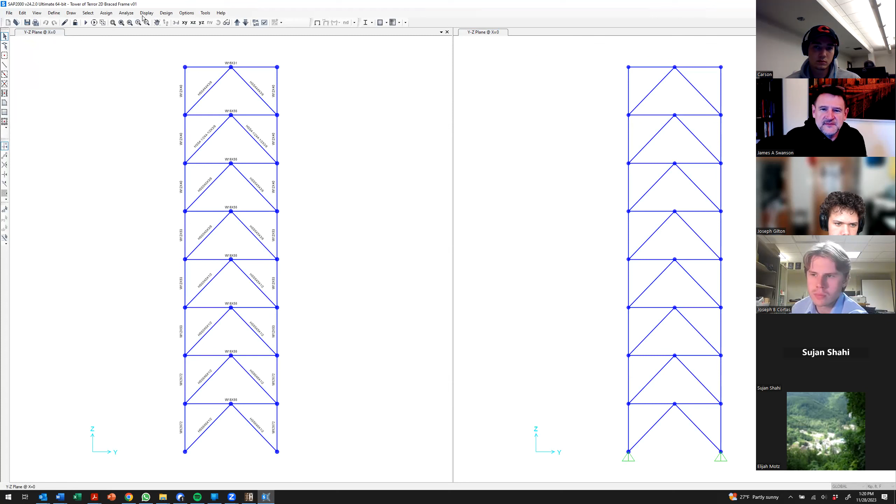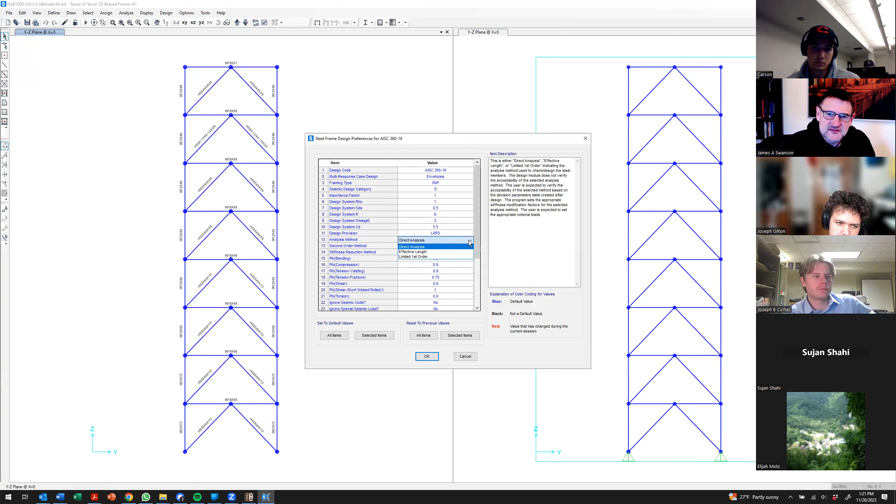All right, so if we go in here and you want to see some evidence of a direct analysis, it's really when you get into the design options. If you go into the design tab, which we haven't used at all, and look at some of the options here, they call them preferences or overwrites, then you can see the analysis method is AISC direct analysis. They include different options there, making reference to the direct analysis method, the effective length method, and a limited first order analysis, giving a description and talking about the different things it's going to do.

But again, you're asking SAP 2000 to calculate notional loads and apply them correctly. You're asking SAP 2000 to reduce the stiffness of members that are in the lateral force resisting system.

Personally, I would trust SAP a little bit more than visual analysis, but I would want to do a bunch of verification problems before I really gave this my true confidence. So I'm not going to dive into this in any detail, but I wanted to show you where these options are available.

When you look at homework number 9, when I ask you to include notional loads, you would do that manually by defining different load patterns. Typically what I do is define a dead load pattern, then an associated notional load pattern along with that. So I define D for dead load, and then lowercase n, uppercase D for the notional dead load. Then live load L, and n sub L as the notional live load.

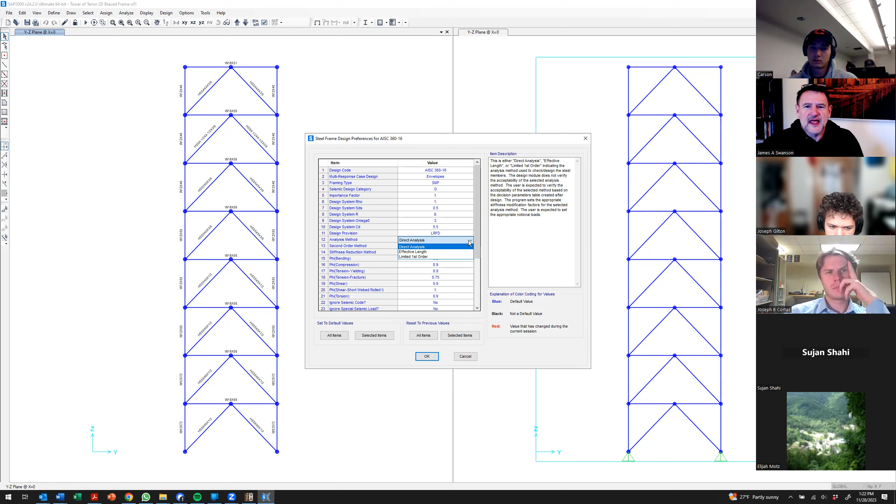I do snow load S, and n sub S as well. Then what you can do is go in and define all of those in your load patterns. I'd define another one, call it n sub d, leave it as a dead load type. Then when you go in and define your load combinations, it's automatically assigned the proper load factor, 1.2 in load combination number 2, for example.

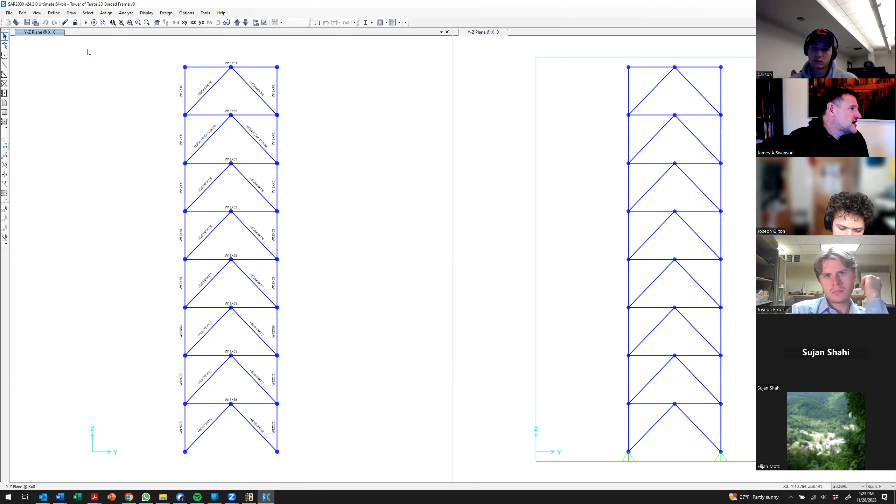But wait a minute, didn't I just say you're not allowed to use load combinations with second order analyses? You have to define the load patterns, you have to define the load factors as a load case instead of a load combination. Well, that's true. So what you can do is go in and add the default design load combinations for steel design, and then convert those to nonlinear cases.

So these are all load combinations. This one is for steel design - if we go in and modify that, it gives us 1.2 times dead plus 1.2 times curtain wall plus 1.6 times snow, right? It included the notional dead load in there, but these are going to be a combination of results of individual analyses. What you can do is actually convert those to nonlinear cases.

Let me go in and show you - gotta cancel out of that, I guess. I'll show you the load cases that we have. These are all linear static load cases. So what you can do is go back to the load combinations and convert those. Let me go ahead and just select all of them.

Did it work? Let's go back to load cases. It didn't work - maybe I gotta select them. There we go. I'll select all of those, hit OK. Now if we go back and look at our load cases, each one of these has been converted to a nonlinear load case.

Let me modify that. So what it does is a P-delta analysis with a nonlinear type, and now it has all of those load factors applied here as a case. So all of the loads are applied during the analysis instead of doing a linear combination of the results. SAP 2000 recognizes the limitations of the load combination approach, so it gives you a button to help you do the right thing and put all the loads on before you do the analysis.

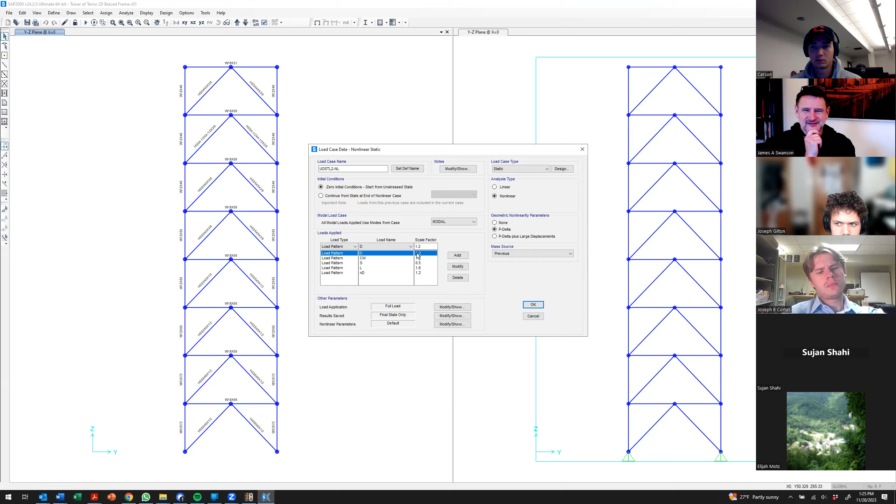All right, that brings us to 1:25, close enough to the end that I'll just call it here. When we get back together on Thursday, I'll show you a little bit about SAP 2000 staged construction analysis. Maybe I'll do a half an hour of that and a half an hour showing you how to do a buckling analysis or a modal analysis or something like that. There's a whole lot more to this - in only 14 weeks and a couple hours a week, we just don't have enough time to dig in that deep.